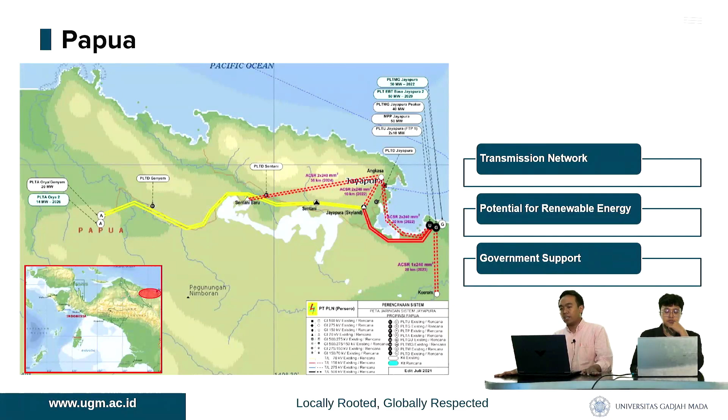Next, I will explain about the current condition of our power plants and the projection of future energy needs based on the data we have collected.

As we can see from the pie charts, PLTG currently dominates with 50.6% share of the total installed capacity. This shows that we are still very dependent on fossil fuels to meet our electricity needs. Other types of power plants such as PLTD, PLTU, and PLTMG also have a significant contribution, but are still far below PLTG. Meanwhile, power plants based on renewable energy sources such as PLTS and PLTA still have a very small share.

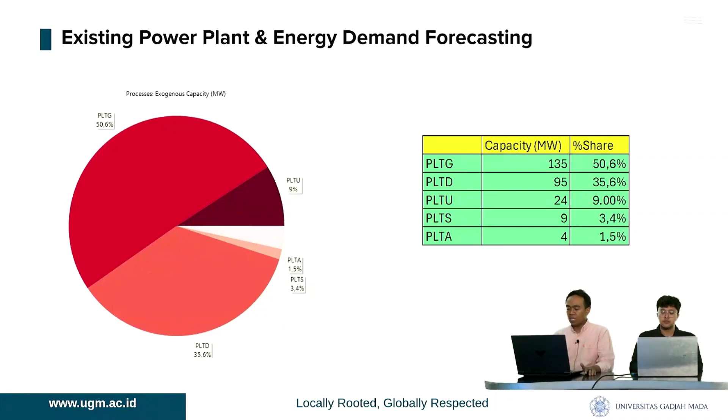So we have analysis based on the data we have. It can be concluded that, first, Papua is very dependent on fossil fuels, especially gas, to meet its electricity needs. Second, electricity demand continues to increase along with economic growth and improving living standards. And last, although still small, the potential for renewable energy development in Papua is very large.

I will explain the National Electricity Supply Business Plan, RUPTL, which is a roadmap for developing power plants in Indonesia. In part A, existing power plants, as can be seen in the table, PLTD currently dominates the installed capacity, especially in the Papua system. This shows that it is still very dependent on fossil fuels to meet electricity needs.

In part B, recapitulation of the power plant development plan, we can see the projection of power plant development until 2030 shows a total additional capacity of 434.7 megawatt, with the main contribution from PLN and IPP. PLTG or PLTMG will be the largest contributor with 145 megawatt, followed by the development of renewable energy such as PLTA, PLTM, and PLTEBT. The largest development will occur in 2022 and 2025, with an additional 116.7 megawatt and 131 megawatt respectively, highlighting the focus on diversifying energy sources.

In part C, potential in Indonesia provides an overview of the potential for power plant development in various regions of Indonesia. There is great potential for the development of solar power plants, PLTS, and then PLTB or wind power plants, and hydropower plants, PLTA.

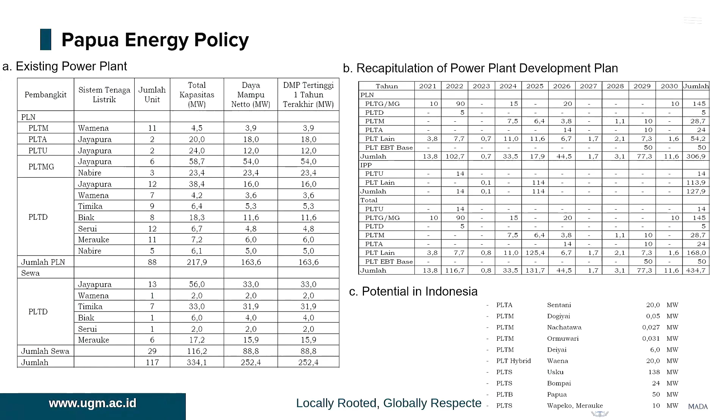So we have analysis based on the data we have. It can be concluded that Papua is still very dependent on diesel and gas to meet its electricity needs. There is great potential to develop renewable energy in Papua, but it still requires stronger policy support.

About alternate energy potential, primary energy sources in Papua that can be utilized for power generation are limited to potential sources of water energy, biomass energy, and solar energy. However, their capacity is very small in locations that are quite far from the load center, which means they are not yet feasible for massive development.

Okay, for the energy mix scenario, I will explain to you. For the scenario development, we developed two scenarios for analysis in this application. The first scenario uses data from RUPTL, the Electricity Supply Business Plan, and RUED, the Regional Energy Plan for Papua, projecting energy needs based on regional plans, local research, policy, and infrastructure. It provides a realistic view of energy development if current plans are followed.

The second scenario follows the government's commitment to achieving net zero emission in 2060, with fossil fuel use phased out and fully replaced by renewable energy, assuming a 5% annual growth in renewable energy. This scenario explores how Papua can support long-term carbon emission reduction by utilizing natural resources like hydropower, solar, and wind.

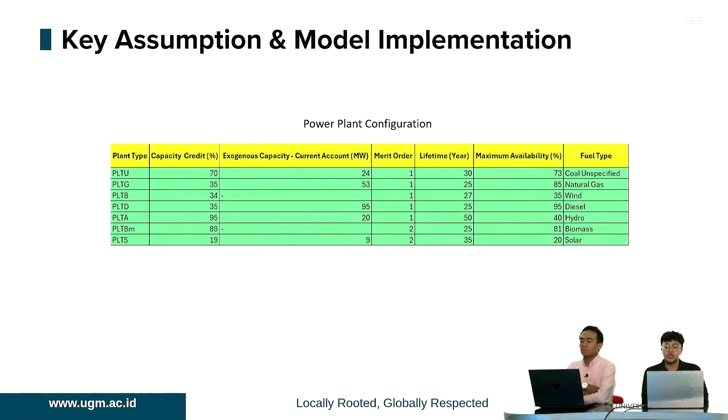And comparing fossil fuels and renewable energy is crucial for Papua's transition toward net zero emissions. And this one is...

Key assumptions and model implementation that we input into LEAP. As we can see, there are 3 tables for the key assumptions and implementation model we use. We can see from the table below that the first scenario uses a step function due to RUED and RUPTL data being based on a 5-year planning interval.

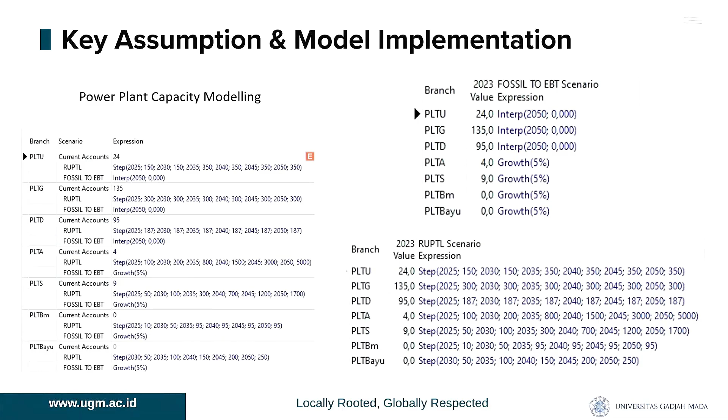In contrast, the second scenario applies interpolation, which is set to 0 for fossil energy in the final project year, 2050, to ensure a gradual decline until 2050 for renewable energy generation. The scenario with a 5% annual increase is applied using a growth function for the renewable energy.

And then this is the final result of the RUED and RUPTL, or the first scenario. The result shows a significant difference after incorporating the key assumptions I mentioned before and implementing the RUED RUPTL scenario model, with a notable contrast in the use of both renewable and fossil energy.

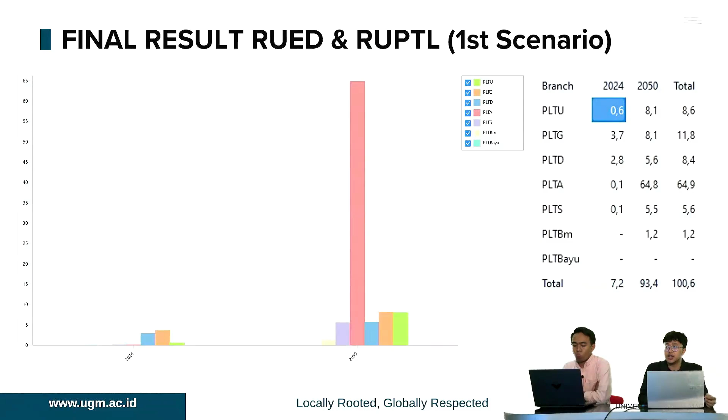This is for the second scenario. The result shows that in this scenario, fossil energy has been substituted with renewable energy, with power plants using hydropower and solar power plant.

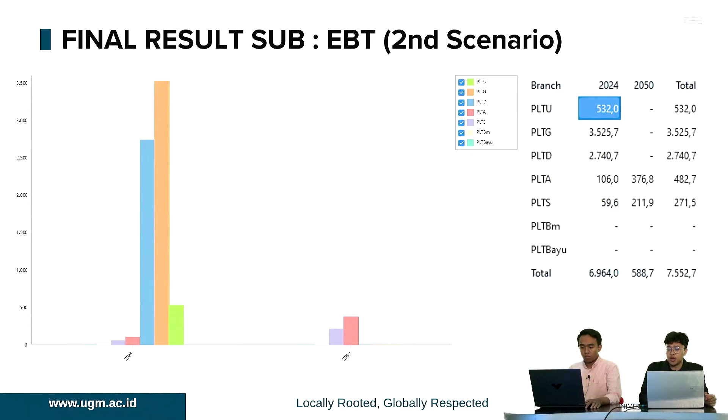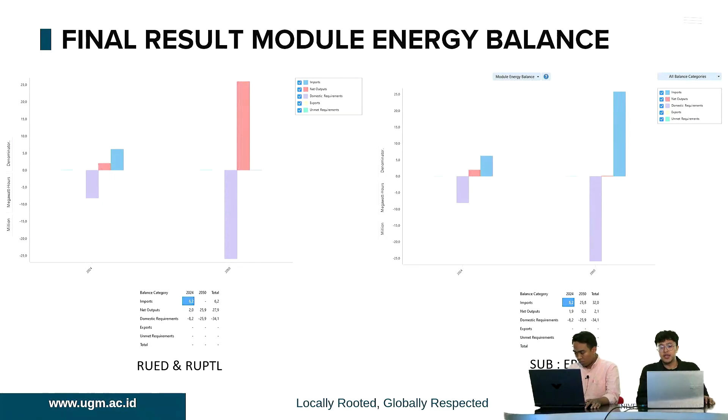And this one is the energy balance module for supply and demand. The table above shows that the RUED and RUPTL scenario successfully meets the energy demand. However, in our scenario, the substitution EBT scenario, there remains a gap between demand and supply.

This indicates that a 5% annual growth in renewable energy is insufficient to fully substitute the electricity demand, suggesting the need for either a higher growth rate or further substitution of conventional energy resources.

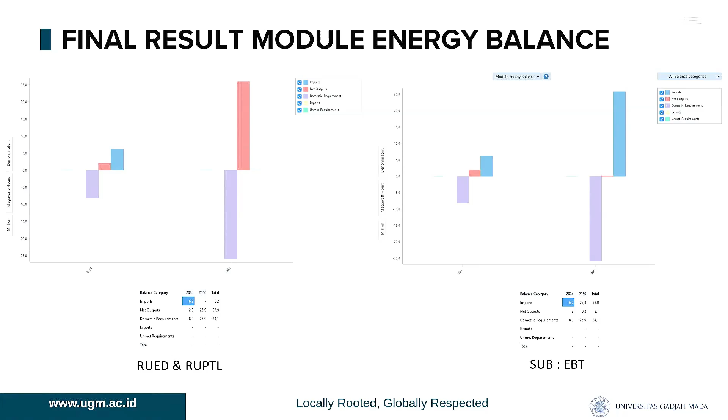Next, Mas Iqbal. Okay, for the general conclusion: first, Papua has great potential in the energy sector, thanks to its transmission network, abundant renewable energy sources, and government support.

However, various steps are being taken to reduce dependence on coal in order to support the achievement of net zero emissions. Second, Indonesia still relies heavily on coal for power generation, but increasing demand and the huge potential of renewable energy show opportunities to create a more sustainable energy future.

Third, commitment from the government is needed to prioritize increasing the efficiency of power plants and exploring the potential for developing renewable energy. And last, only a small portion of Indonesia's alternative energy potential is utilized, emphasizing the importance of maximizing renewable resources that remain unexplored.